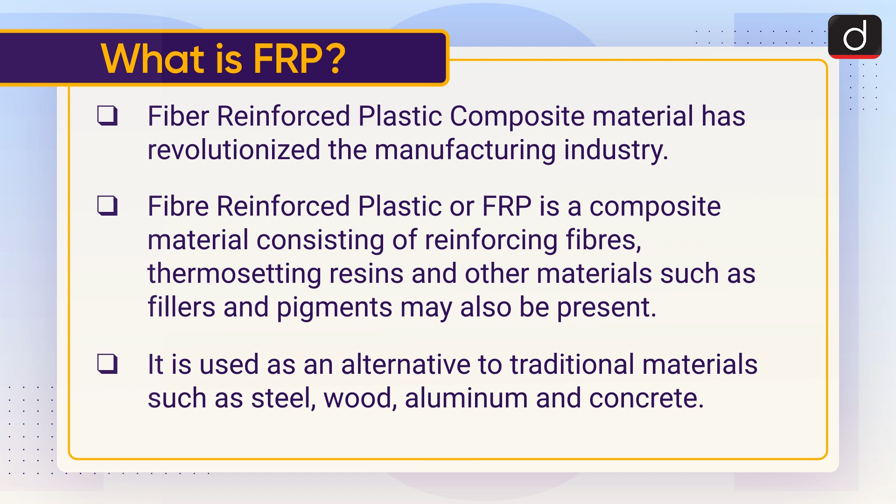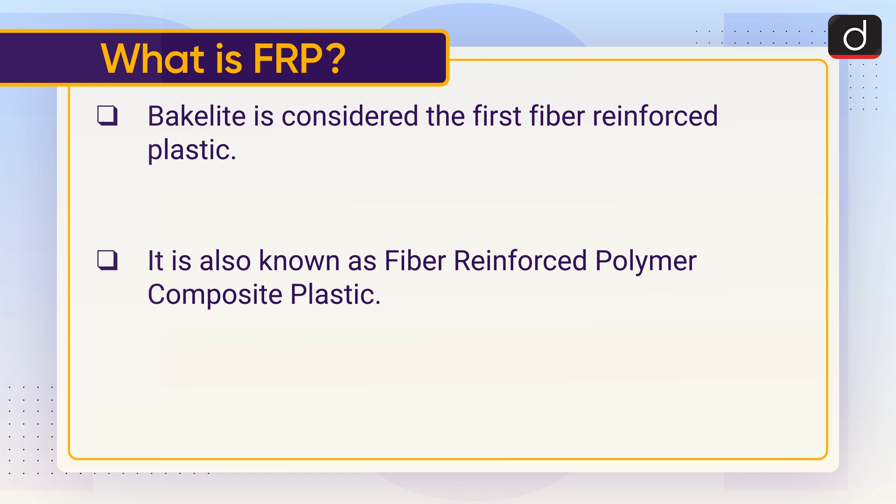So first, let's understand what FRP is. Fiber Reinforced Plastic composite material has revolutionized the manufacturing industry. FRP is a composite material consisting of reinforcing fibers, thermosetting resins, and other materials such as fillers and pigments may also be present. It is used as an alternative to traditional materials such as steel, wood, aluminium, and concrete. Bakelite is considered the first fiber reinforced plastic. It is also known as fiber reinforced polymer composite plastic.

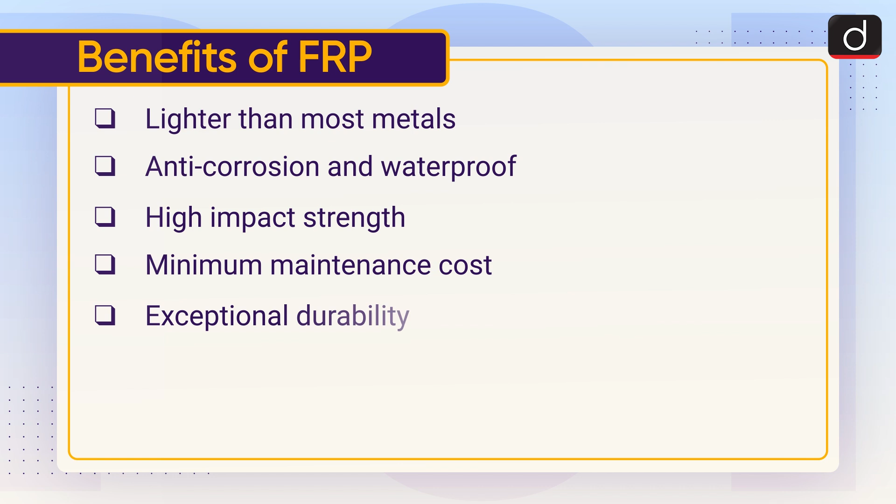Now let's discuss the benefits of fiber reinforced plastic or FRP. The benefits of FRP are as follows: it is lighter than most metals; it is anti-corrosion and waterproof; it has high impact strength; it has minimum maintenance cost and exceptional durability; it is impermeable to moisture, fungus, bacteria, etc.; and it can be easily reused.

Now let's discuss the applications of FRP or fiber reinforced plastic. Applications of fiber reinforced plastic are found in the following sectors: manufacturing sector, energy sector, aerospace, automobile, and other industrial sectors.

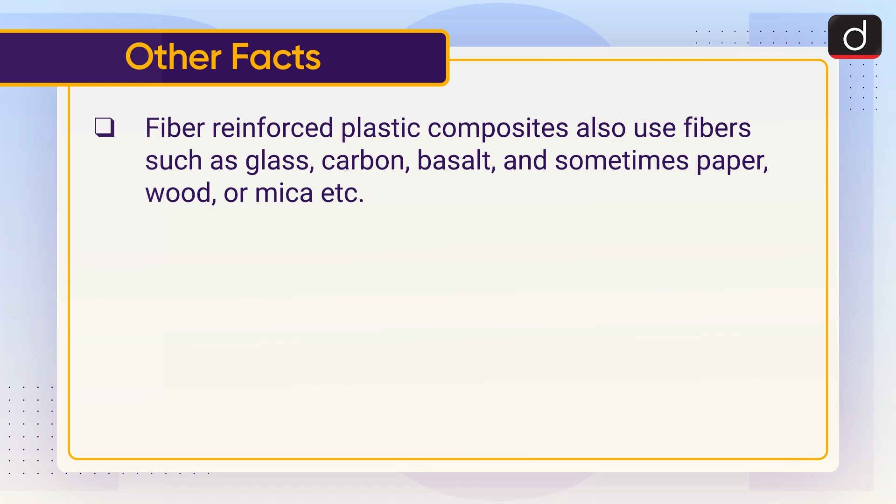Now moving on to some other important facts related to this. Fiber reinforced plastic composites also use fibers such as glass, carbon, basalt, and sometimes paper, wood or mica, etc. The material used as a polymer usually consists of vinyl ester or polyester, thermosetting plastics, or phenol formaldehyde.

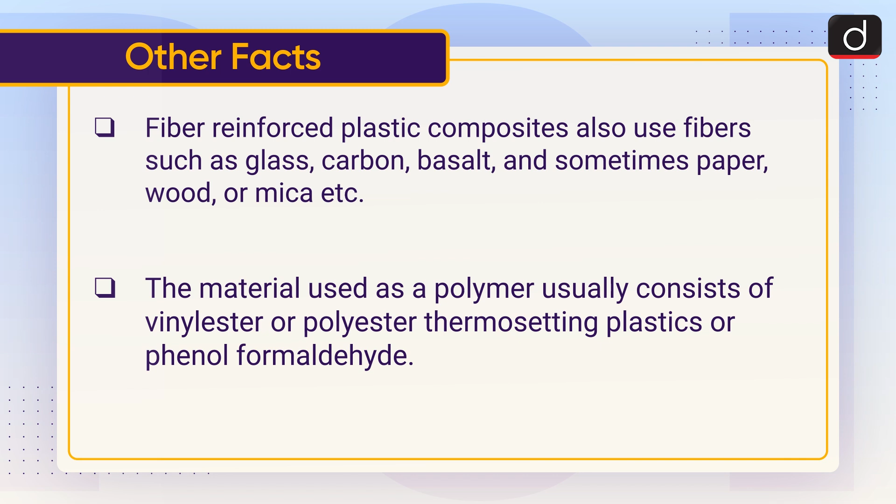Now moving on to the practice question. With reference to fiber reinforced plastics, consider the following statements: 1. Bakelite was the first fiber reinforced plastic. 2. The application of fiber reinforced plastics ranges from manufacturing to automobile and aerospace. Which of the above statement or statements is or are correct? A. Only 1, B. Only 2, C. Both 1 and 2, or D. Neither 1 nor 2. Send the answer of this question in the comment section.